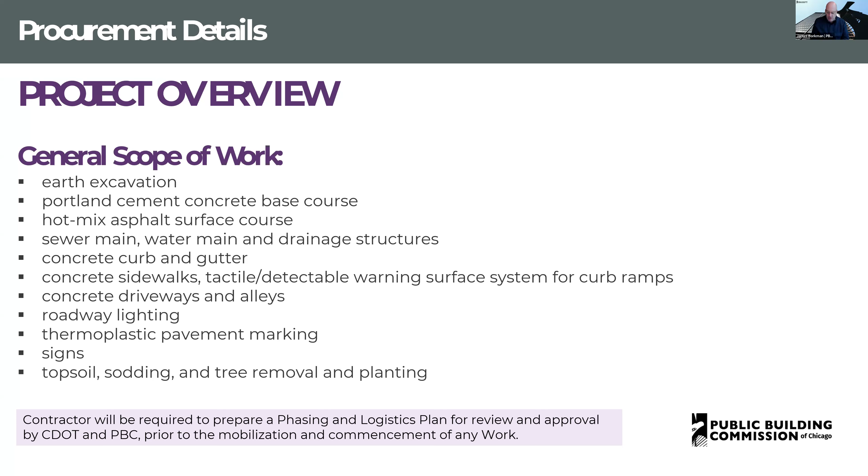The time of completion requirements for this project can be found in Book 1, Section E. As published, you'll see the scheduled milestones and substantial completion date. Substantial completion has to be achieved no later than October 31st, 2025, with a scheduled first milestone for permitting, mobilization, and site control, as well as the submittals, no later than March 31st, 2025, commencing no sooner than January 14th. Substantial completion, as discussed, is October 31st, 2025, with no sooner start than April 1st.

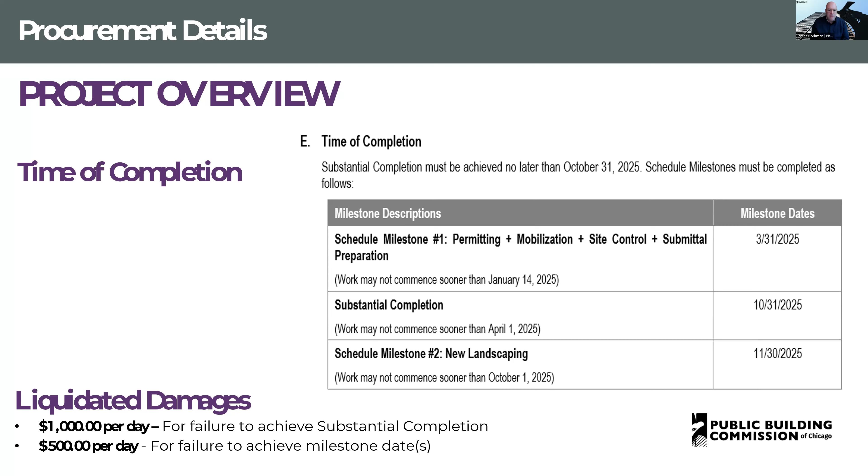And the scheduled milestone number 2 is the landscaping. This is a fall landscaping schedule starting at October 1st, 2025, and wrapping up by November 30th, 2025. For this project, the liquidated damages, as stated in Book 1, are $1,000 per day for failure to achieve substantial completion, and $500 per day for failure to achieve each of those milestone dates.

All the documents are available on the PBC website and from our online plan room with our printing contractor Cushing and Company. You can find the PBC Current Opportunities page by clicking on the link here for Oakley 94th and Oakley. All of the drawings and tech specs are available from the online plan room at Cushing Co, and their contact information with Diane Nelson being our contact there is included just below.

As you know, the PBC is very proud of its M/WBE commitments. We're very, very adamant that we want partners and partnerships to be developed. To that end, we have a number of assist agencies that work with the communities and surrounding areas. We highly encourage you to work with the assist agencies. All of the information and their contact information can be found in Book 1 as well as on the PBC's website at pbcchicago.com under Doing Business and then the Assist Agencies tab.

Immediately following this meeting, we'll have the tech review meeting. No site visit has been scheduled at this time. However, just because there hasn't been a site visit scheduled, it does not relieve the bidder of their responsibility to become familiar with and understand the sites, the locations, as well as the contract documents.

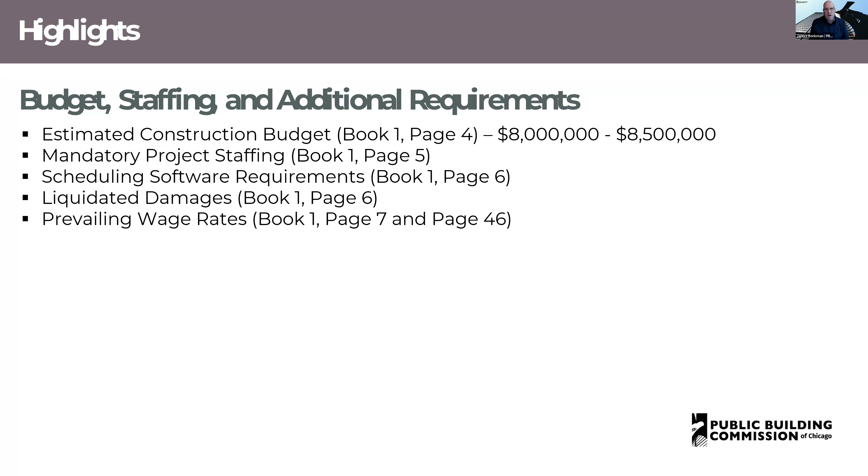Scheduling software requirements can be found on page 6. Liquidated damages can also be found on page 6. And the current prevailing wage rates that were available at the time this was published can be found on page 7, as well as the further requirements with a direct link to the Illinois Department of Labor's website.

As I said earlier, the PBC is very proud of our M/WBE commitments and compliance department. To that end, we highly encourage joint venture opportunities.

If you'd like to joint venture, you need to complete this document, which is a Schedule B, a joint venture affidavit, letting us know that you're going to joint venture. You can find it on page 31 in Book 1. You'd also need to submit a JV agreement between you and the joint venture partner, as well as the certification letter of that joint venture.

As Patrice will remind you momentarily, we only accept Cook County and City of Chicago certification.

Across the bottom of the bid form, you'll find 3 separate tabs, one for each of the roads, streets involved in this project. As you populate these, the master bid form will automatically fill in.

All you need to do, looking at the South Oakley and Garfield Boulevard location, is complete your unit pricing located in the red circled area. The unit pricing will automatically total and will move that total into the base work only section of the bid form.

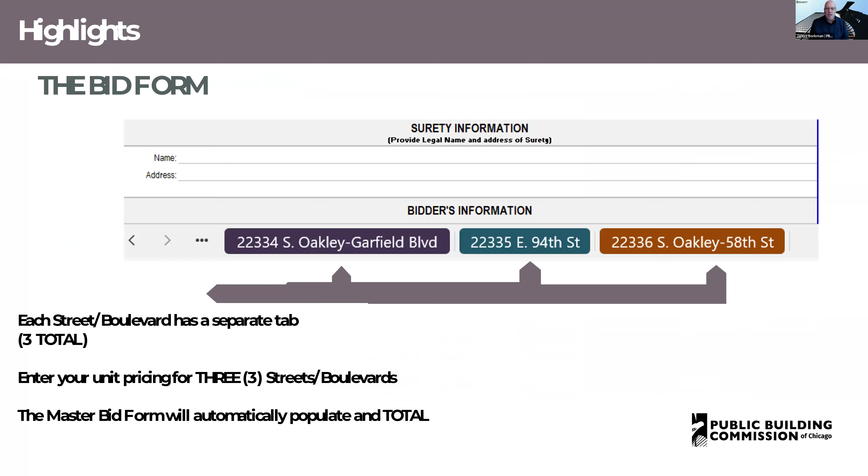Lastly, you'll complete your award criteria figure formula sheet. These are the minority journey worker, minority apprentice, minority laborer, female journey worker, female apprentice, and female laborer commitments you're willing to make for this project. You'll also complete the bidder's information on this sheet, which will provide the automatic grand total award criteria figure for the project, shown at the bottom of the screen, line 14.

For the Public Building Commission, award will be made to the responsible bidder submitting the lowest grand total award criteria figure, whose grand total base bid is within the funds available for each street or avenue and is otherwise responsive to all requirements of the CDs.

You're required to fill out the entire bid form. Failure to do so deems you unresponsive. The commission reserves the right to reject any and all bids wherever it's in the best interest of the commission, and any materially unbalanced bids are rejected.

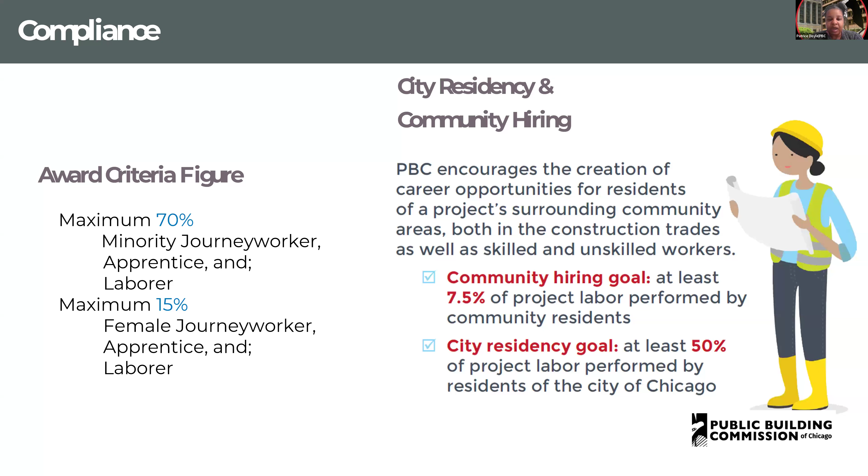B2G is now our MBE WBE compliance monitoring system. Established businesses are MBE or WBE firms in the process of graduating from certification, and they will receive the credit amount of their certification from the city and/or Cook County. So if this is their first year, they'll receive 75% credit, second year 50% credit, third year 25% credit. Manufacturers receive 100% credit, suppliers receive 60% credit, and brokers receive 0.

You must submit a Schedule D as well as a Schedule C with your bid package. This is the Schedule D. The credit amounts mentioned earlier should appear on the Schedule D, not the contract value. So for an established MBE or WBE in their second year of graduation, they'll only receive 50% credit. If their contract value is 100,000, then 50,000 should appear on the Schedule D. For suppliers, if their contract value is 100,000, only 60,000 should appear on the Schedule D. This is the credit amount for the MBE and/or WBE.

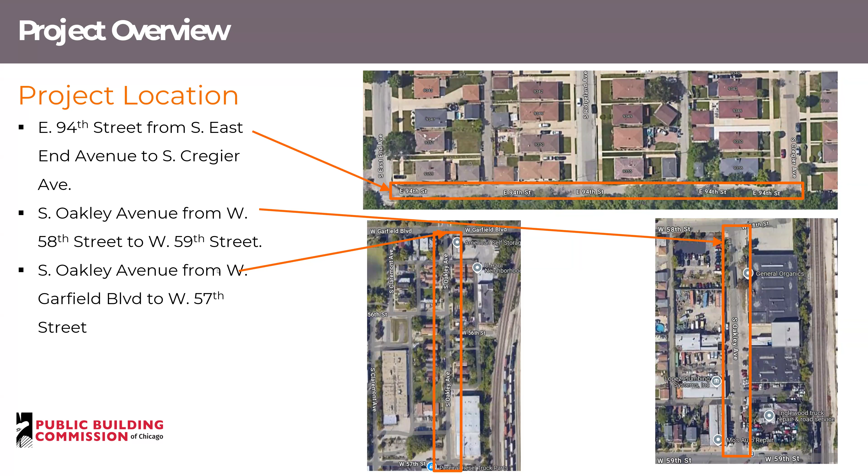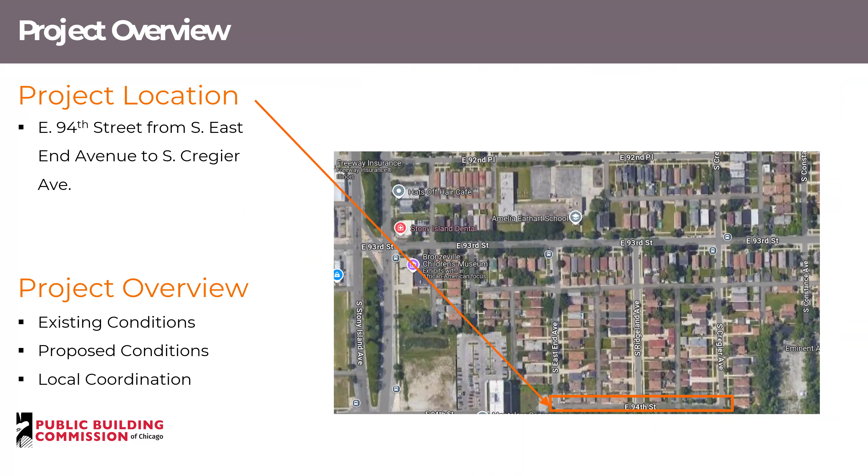East 94th Street from South East End to South Cregier. We'll go over the existing conditions, the proposed conditions, any local coordination, and any concerns we have with the site.

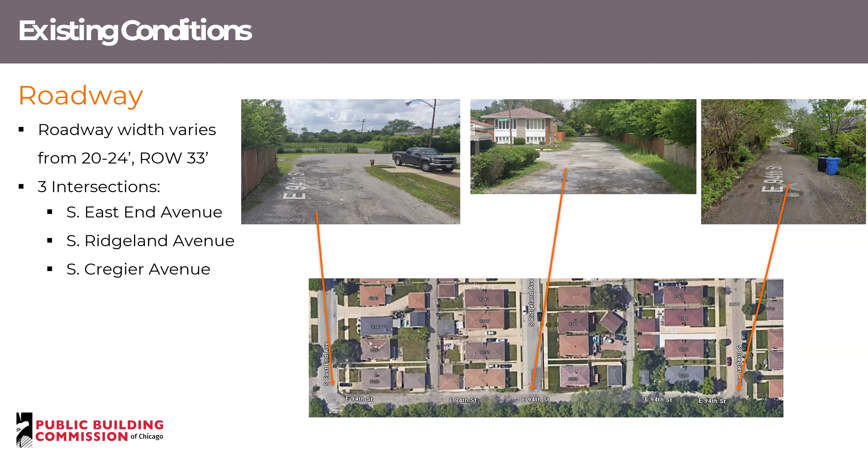As mentioned previously about the curb and gutter, the poor pavement condition, that's the primary concern with this project, and we'll also be replacing that fence along the south side.

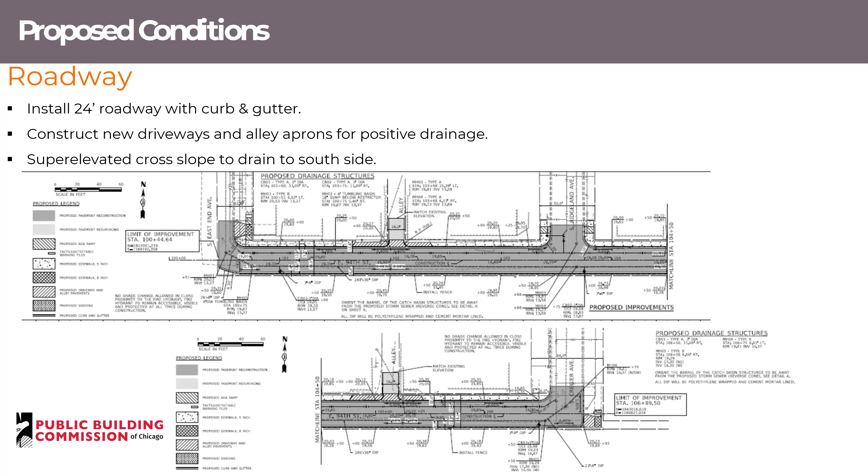For a roadway, we have a 33-foot right-of-way to deal with, so we don't have the typical 66-foot with this one. In order to reduce our catch basins to 3, we super elevated the cross slope to drain to the south side, and we put in a storage pipe that connects at East End and Cregier. It's a 24-foot roadway, as well as new driveways and alley aprons along that north side.

We'll be installing a 5-foot sidewalk on the north side as well, and an ADA crossing at South Ridgeland Avenue.

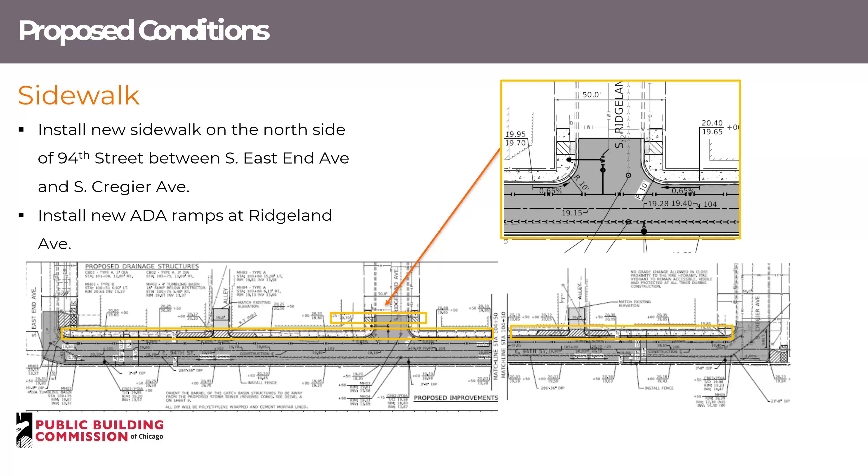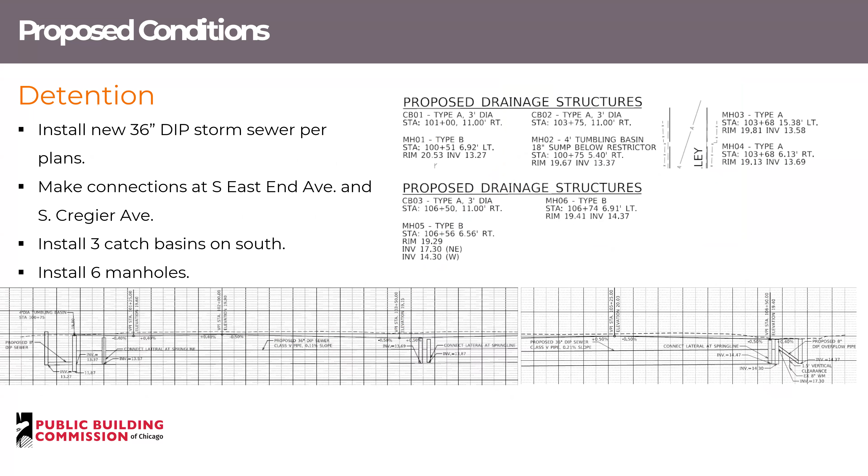Our detention design for this uses a 36-inch ductile iron pipe. We have 3 catch basins, 6 total manholes. We connect to the existing mains on East End and Cregier, but we will not connect on Ridgeland, though we will be replacing the manhole at that location.

Our water main design is 8-inch main for the entire limits of the project and 1 fire hydrant. On this site, there are no service lines, and we'll be abandoning the other main at its location.

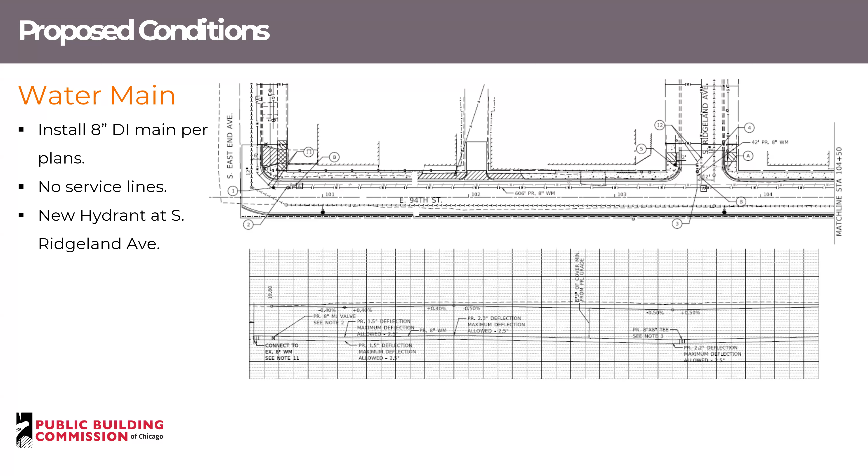We put together a maintenance of traffic plan for this project. We'll be able to do a full closure.

At the alley locations, they just need access for waste disposal. And at Cregier and 94th, that southeast corner, that resident only has access off of Cregier, so that will need to be coordinated to ensure they can access their home and driveway.

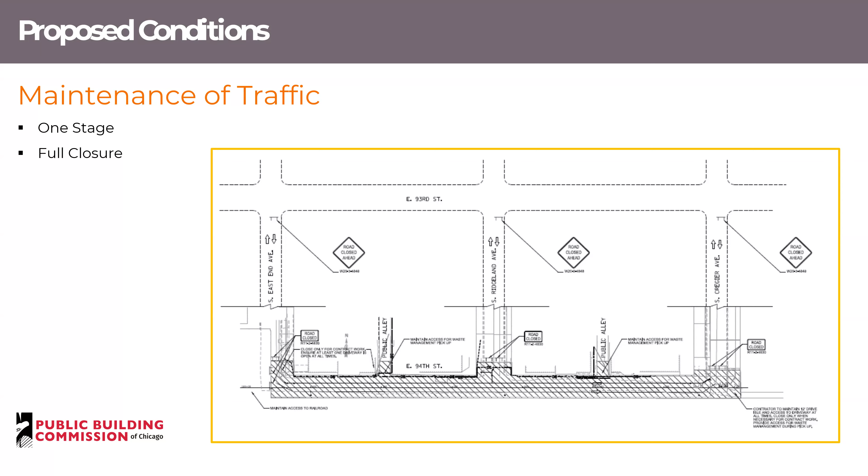Our lighting design is pretty typical across the entire WPA program. It'll be the piggyback lighting with the acorn pedestrian luminaire and the Cobra head for the street luminaire.

Landscaping for this project on 94th doesn't have too much. There are tree removals along that south side by the fence line, and we will be filling in the back of that curb line on the south side with grass, sod, and topsoil.

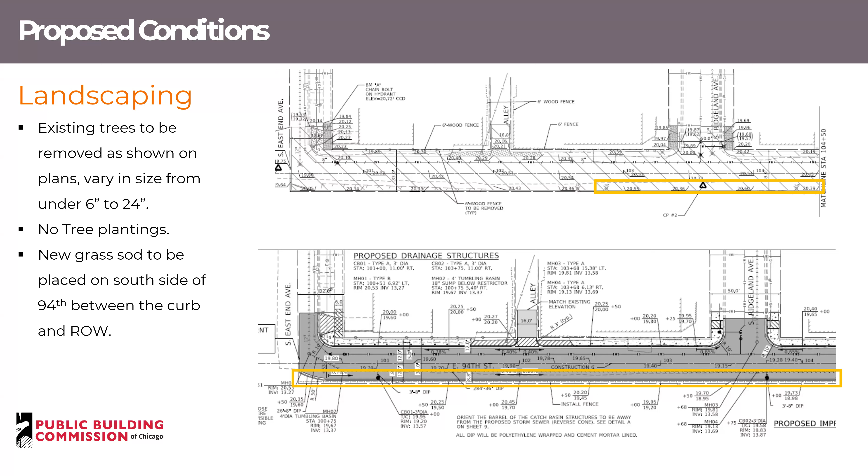Our next site is South Oakley Avenue from 58th to 59th Street. We'll go over the existing, proposed, and local coordination.

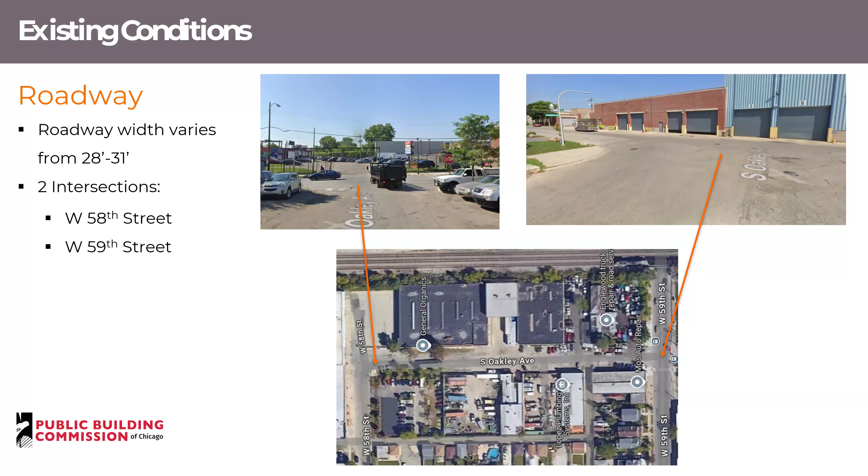Similar to our other project on 94th, the typical pavement is HMA and it's in fairly poor condition. The existing roadway varied from 28 to 31 feet, and there were no curb lines. We determined that we'll have 2 intersections on this project, with 58th Street and 59th Street.

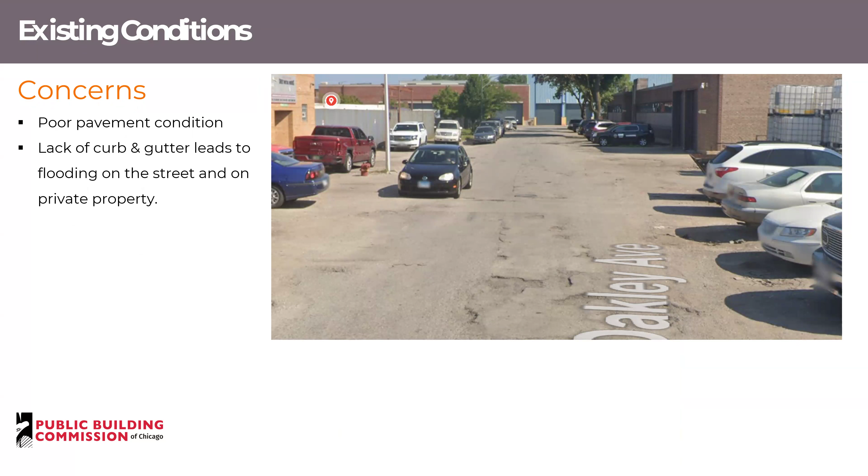As mentioned, the lack of curb and gutter and poor pavement condition is a concern on this site. There are also some details discussed during our MOT slide with additional concerns for the construction of this project.

So we'll have a 31-foot roadway here, and we'll reconstruct it. There's a number of driveways and alley aprons up and down this side, so there'll be quite a bit of work in replacing those.

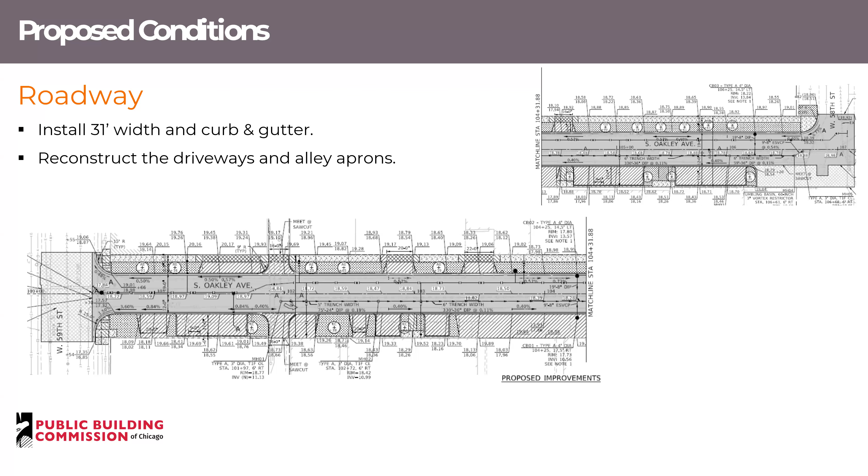We will be putting in a new ADA crossing at 59th Street. It's also worth noting that 59th Street does have a CTA bus route that we will need to maintain for this project.

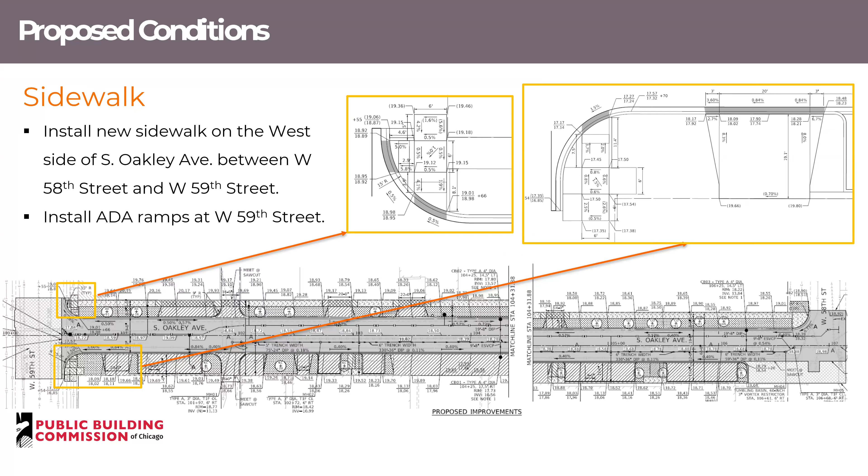Similar to our 94th Street project, we also have another detention design here. It'll be a 24-inch and 36-inch ductile iron storm sewer. We have 5 manholes and 3 catch basins for this site.

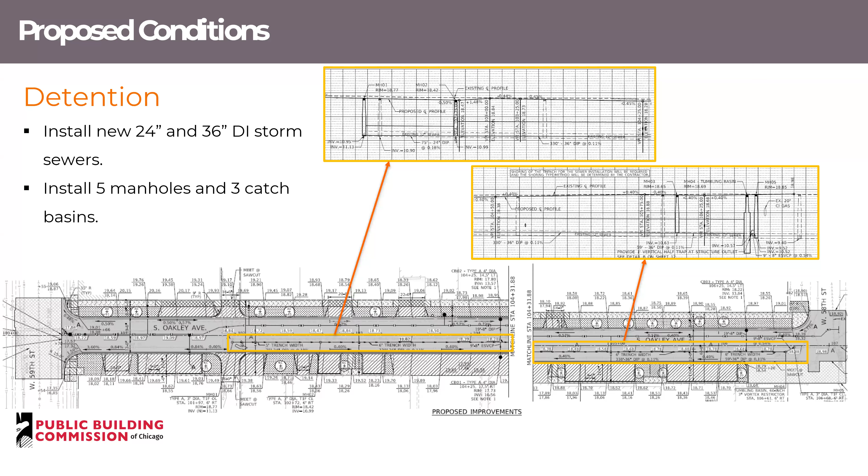For our water design, it'll be an 8-inch main for the project limits. There are 7 lead service lines and 1 fire hydrant.

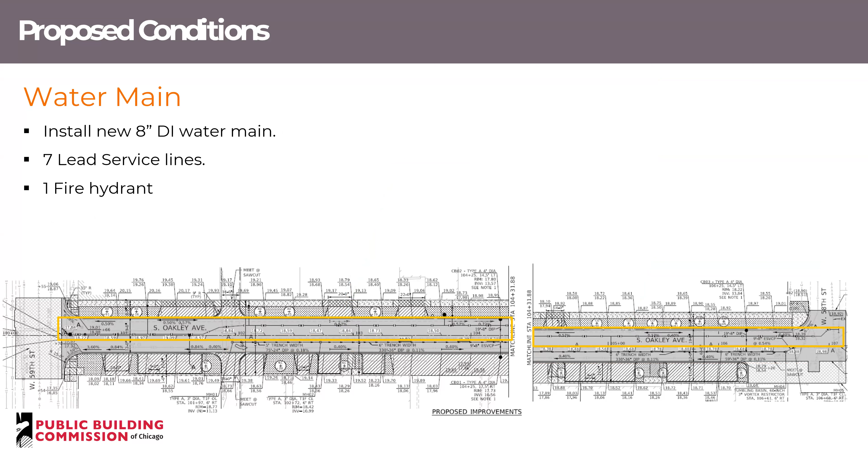With those lead service lines, anything that crosses our sewer—there's 3 on this site—will need to be temporarily supported with either a type 2 or type 3 temporary support. We have details for those in our plans. The type 3 will be used for anything less than 3 inches, and anything 3 inches or greater will use the type 2.

For maintenance of traffic, this project we broke down into 3 different stages. There's a number of companies up and down this stretch of South Oakley, mostly dealing with vehicles.

Lighting, same as before—it'll just be the piggyback with the Cobra and Acorn luminaires.

Oakley has tree removals, tree plantings, and then topsoil and sod. Most of the tree removals are further towards 58th Street, as well as the tree plantings.

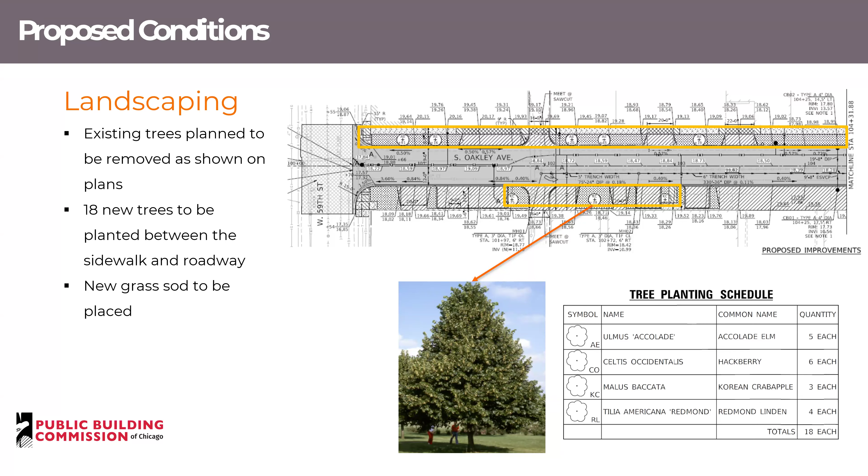Our third site is Oakley from Garfield Boulevard to 57th Street.

Our existing condition varies from 25 to 28 feet. This is another one that has some curb work at the intersections of 56th Street, and I believe again at Garfield, but typically our site does not have much curb and gutter. This site will cover 56th Street and Garfield. 57th Street is actually outside of our limits for this one.

Similar with our other projects, typical poor pavement condition. You can see rutting, visible potholes, no visible drainage anywhere. So that's why this fell to the WPA program.

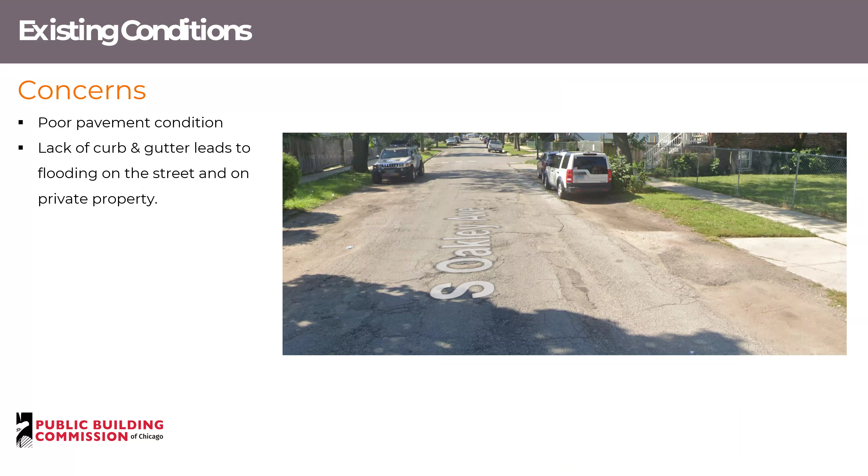We'll put together a 30-foot face-to-face roadway with curb and gutter, and then new driveways and alley aprons up and down. A lot of residents have driveways, and there's also a chemical supply company closer to 57th Street that has 3 large garage doors we'll discuss during our MOT plans.

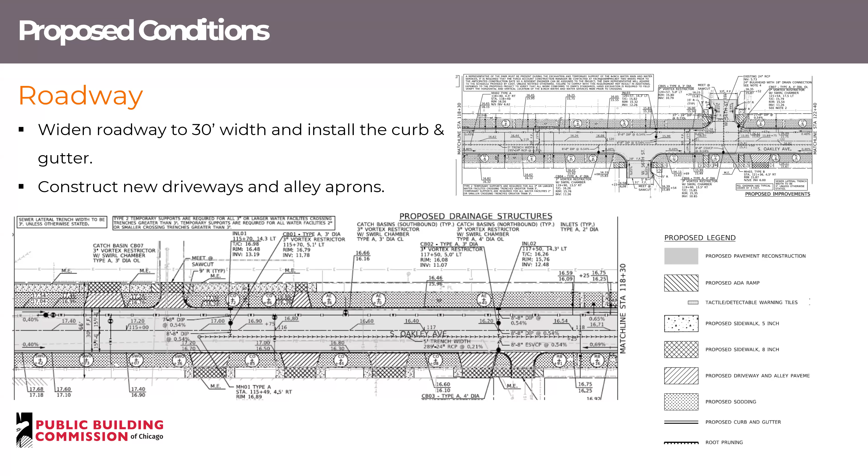We'll be installing crossings for both legs of the 56th Street intersection. That'll be all of our ADA work. There won't be any ADA work at Garfield or by 57th.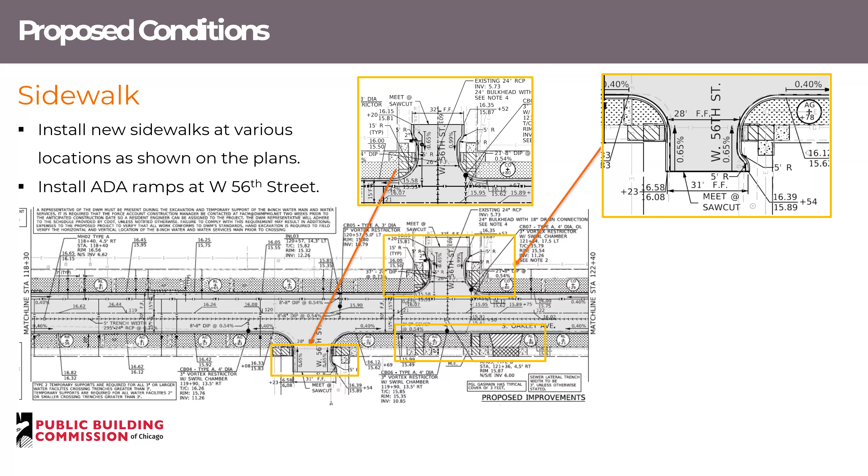This project is a little bit different than our detention design for the previous two. Department of Water Management wanted to upsize the existing sewer from a 12-inch to a 24-inch, and we'll have 4 manholes, 9 catch basins, and 4 inlets to go with that design.

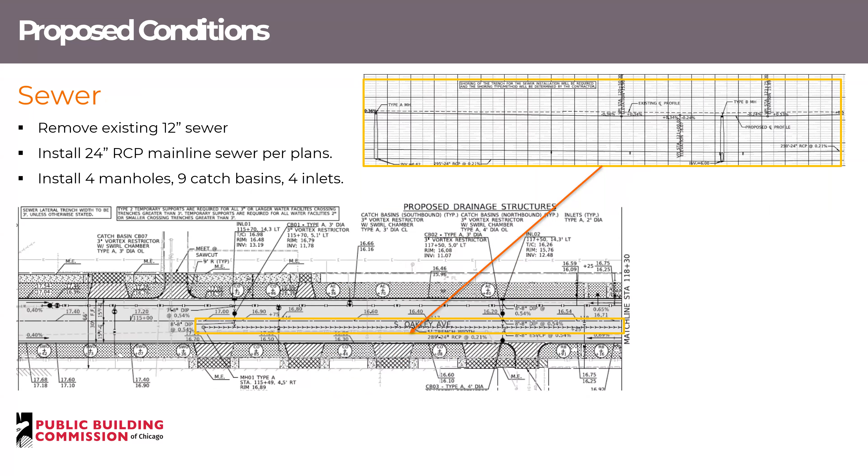Water main, we'll install the 8-inch water main along this. It's quite some, maybe 1,300 or 1,400 feet. We have 29 lead service lines, so we have quite a bit of work replacing all those lines and a number of crossings for the 24-inch sewer.

Anything crossing a trench greater than 3 feet needs to be supported, which is any utility 18 inches or larger. So for us, the 24-inch sewer classifies that. We will also need to support the water main over the 24-inch sewer that we're building out to 56th Street.

There is a DWM in-house sewer project that is anticipated to be completed by June before the start of this project.

Similar with our project, we put together a maintenance traffic plan for this, in 3 stages. This first stage allows access from 57th down the right side of Oakley and then out through that alley. That alley loops past 56th Street and connects near Garfield. So the residents on that side will have access to their garages with that staging.

Second part is just to do the work that's not covered in there, which would be that portion by 57th Street by the chemical manufacturer on Oakley. And then our third stage will be to get the second half of that portion. We need to make sure at least 1 or 2 of the garage doors are open so that they can operate normally.

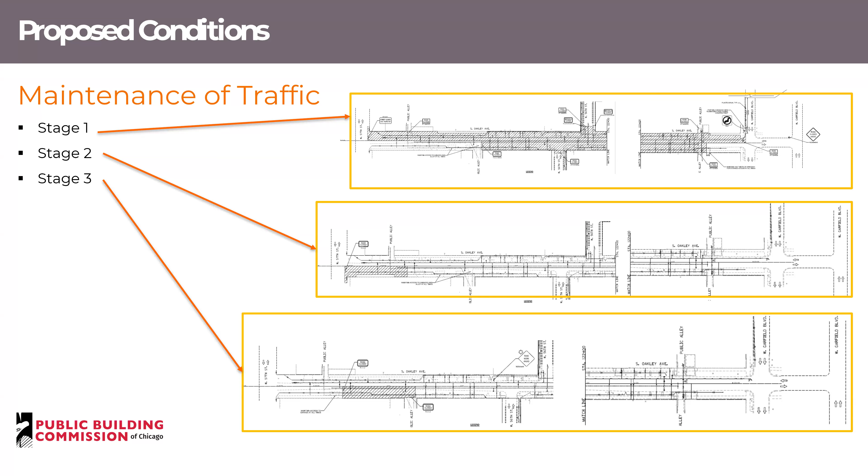Our landscaping design, this portion of Oakley is residential pretty much on both sides, so there'll be quite a few parkway trees. We have 35 of them. There'll be a number of tree removals as well, and a considerable amount of topsoil and sod.

Similar with the lighting is the piggyback for the Cobra Head and the Acorn Luminaire. We have plans calling out the locations and details in our book 3 and our plans for this work.

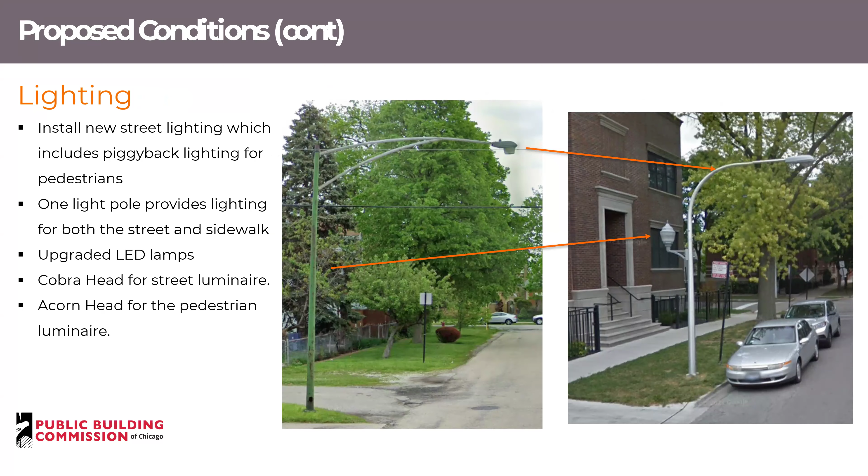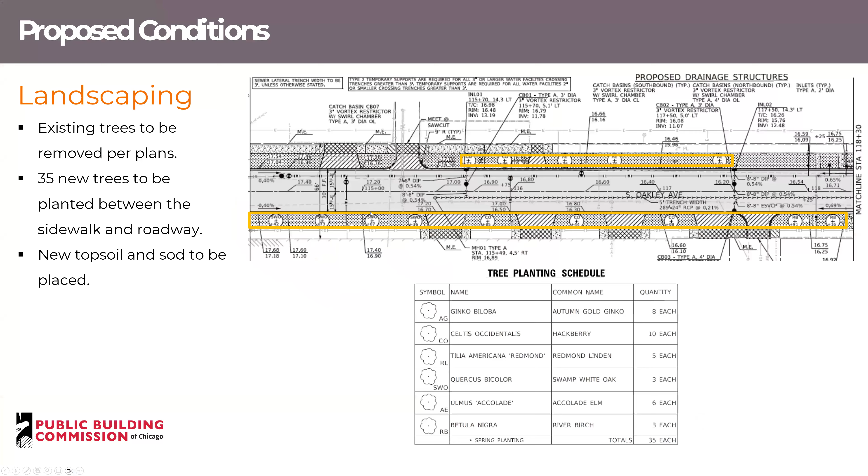This is Will. I want to ask a question about the 36-inch ductile iron pipe versus the water main. We just had the project on Central Avenue, which was basically the same thing. Are we ensuring that we're making the clearance, because we only need 10 feet of space between the water main and the 36-inch ductile iron pipe?

Well, with the clearance, the primary concern wasn't getting the horizontal clearance. It was with the thickness of the RCP pipe, we couldn't cross the water services over with sufficient coverage. So that was why we changed to ductile iron.

Okay, that makes sense then, because I know we were able to save a lot of money due to the fact it was reinforced concrete pipe versus ductile iron, which we didn't. All we needed was the parallel distance, the horizontal separation of 10 feet. Okay, cool.